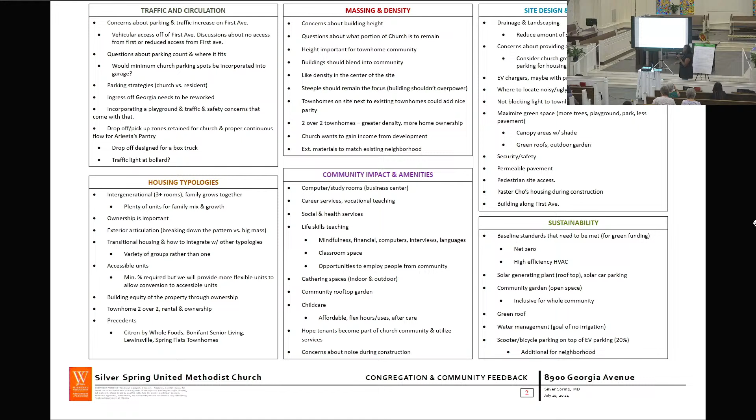Thank you, Allison. And I think on that note, we're not going to go through all of these topics because I don't want to keep you here forever, but you can refer to the presentation online if you want the details of everything. But we did have a visioning session with a lot of familiar faces that I see here participated in. Just by a show of hands, how many of you were a part of that session, that most recent one?

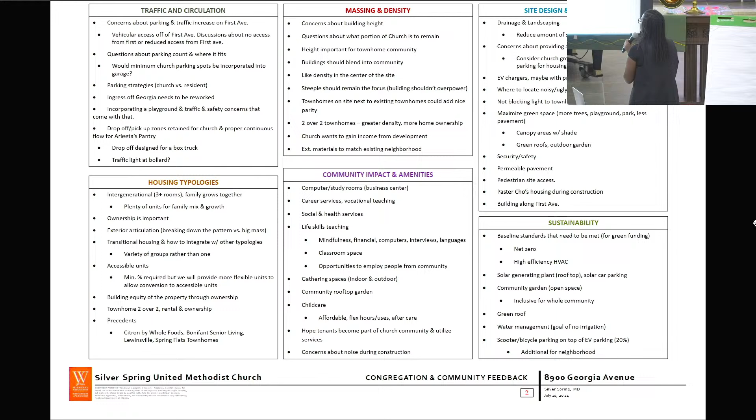We got so much more feedback than we were even expecting, and we really wanted to take all of this and do an exploration to see how we can begin to work this into a couple of different concepts. So before we get into a few of the first iterations of concepts that we did...

One thing that was talked about a lot during the massing discussion was the steeple. The steeple is such an iconic symbol of this site, of this church, and we wanted to make sure, and I think a lot of the community members we talked to wanted to make sure that the steeple wasn't going to be dwarfed by anything we put there. That absolutely will not happen, and we can show you a little bit about that as we go on. But maintaining the steeple as an important symbol was really important to everyone, so that's definitely an aspect we were looking into.

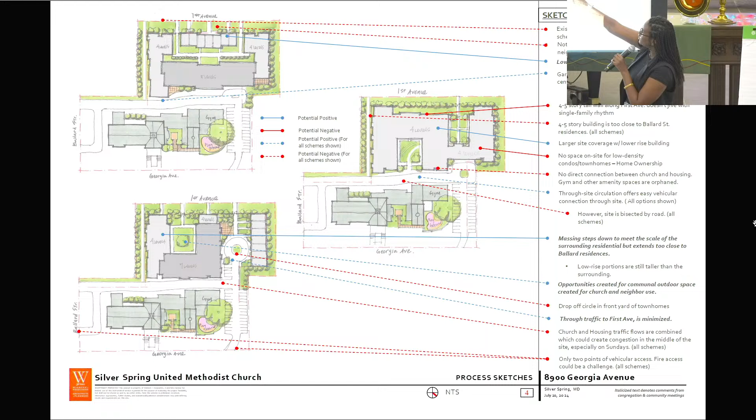We think the placement of the townhomes in both are actually a net positive. We like in the top scheme having the townhomes facing First Avenue. It brings down the scale of the massing to relate to the homes across the street a little better.

But placing the townhomes on the bottom scheme also helps relate to the townhomes that already exist here.

And that was actually a note taken from the last session, one of the suggestions that was given. So we looked at it and explored a couple of different locations, and we think we can see positives with both, as you'll see in the next concept.

Another big item with these schemes is the circulation. You can see they all have the same circulation pattern, with a connection from Ballard to Georgia.

There is no through connection and no vehicular connection to First Avenue, which can be a positive in some ways, reducing traffic to First Avenue, and I think that's the direction we were trying to go in initially.

But on the previous slide, we mentioned that the pantry service has a circulation that works very well, coming in from First Avenue and going through.

You can see that in any of these schemes, that would be pretty heavily disrupted, so you'd now be recirculating a lot of that traffic through the same central roadway.

Another aspect of the central roadway we thought we could do a little better on is that it bisects the site, with the housing at the top of the page and the church at the bottom of the page.

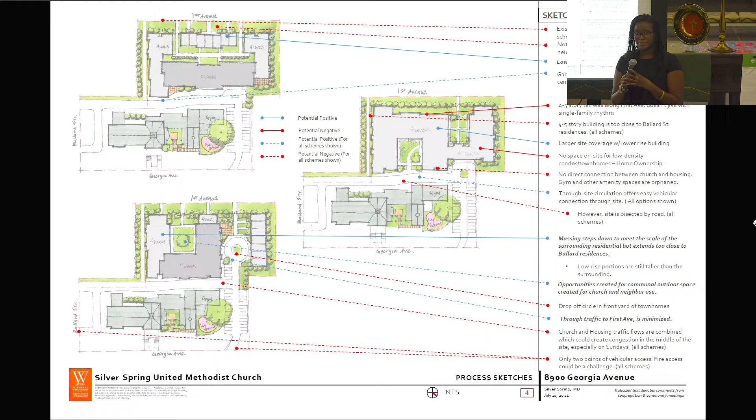So there's no opportunity for a direct connection between the future housing and the church building, which takes away some opportunities for community, for chance meetings, and for communication between the two.

So that was something we wanted to address in the next iteration of the scheme. And then the last thing I want to talk about with regards to these previous iterations is how far the building extends over to the Ballard Street side.

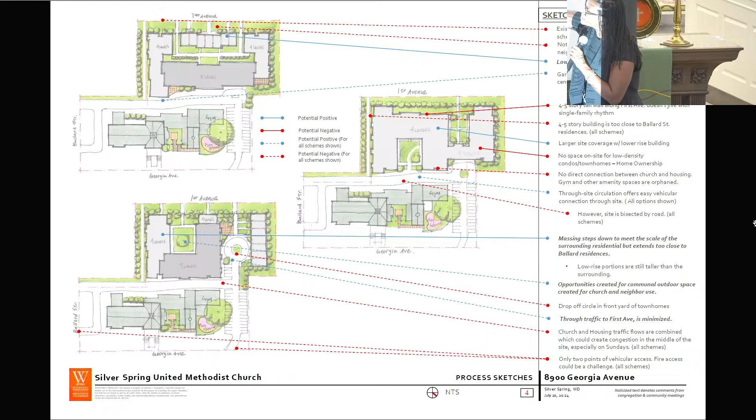So there's existing residences right here. You can see in all of these, we're pretty much adhering to the 25-foot setback limit from the property line, which puts our building massing stepping down to like a 4-level building, but even with that, you still get kind of a wall of building up against those properties, which may not be ideal. So in the future iteration we tried to address that and pull the building back a little so it doesn't feel so close to the neighbors.

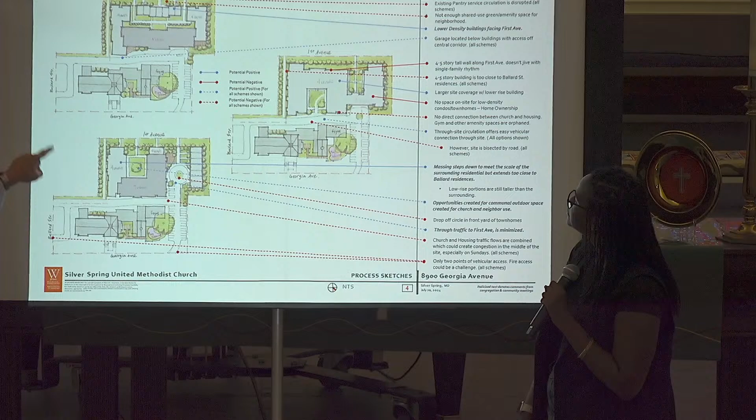So just a couple things we wanted to talk about. In all these schemes, we tucked the parking underneath, accessed off this connector road. But what that does is push what could be a 4-story building into a 5-story building along this connector road, with everything basically up another level. So again, we'd call it 4 stories, but in fact it would really be 5.

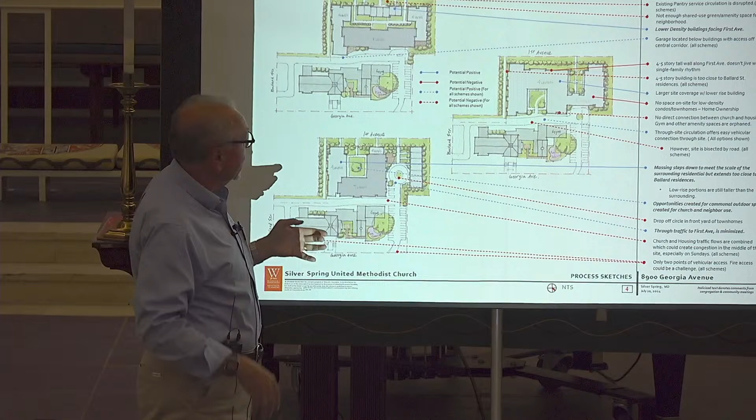We really like the idea of putting the townhomes across the street from single family. But to maximize home ownership opportunities, we have 2-over-2s, which are a 2-story townhouse with a 2-story townhouse on top. So that's in fact a 4-story building right there against the street, and we weren't able to pull that back in this scheme or any of these schemes.

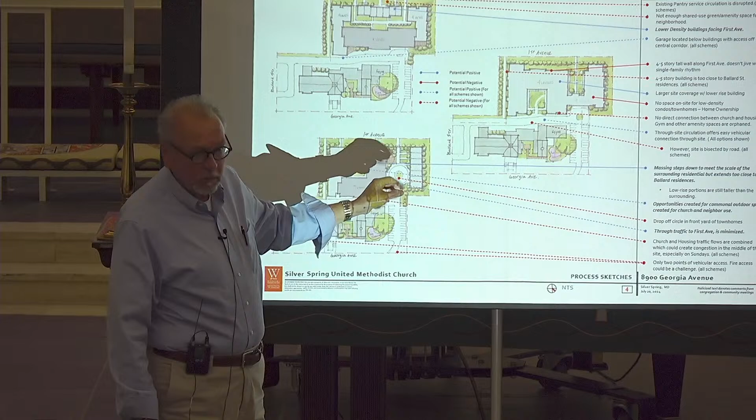In all of the schemes, we thought we had a good amount of green space, but we started to notice that all of them create a wall that prevents people from coming through the site. We really want to encourage the neighborhood to be able to use the site, and we want to build amenities on the site for the neighborhood.

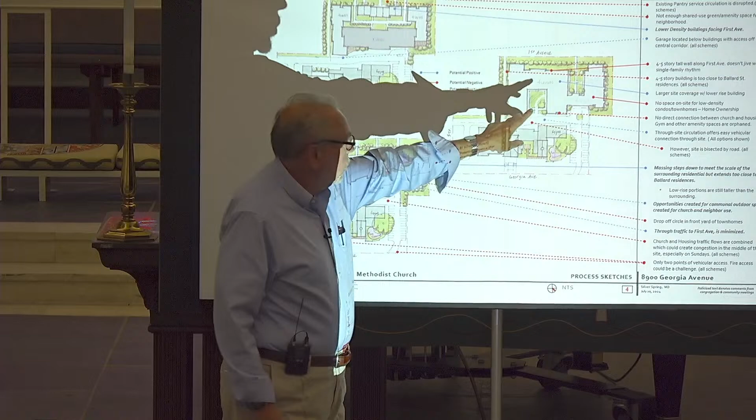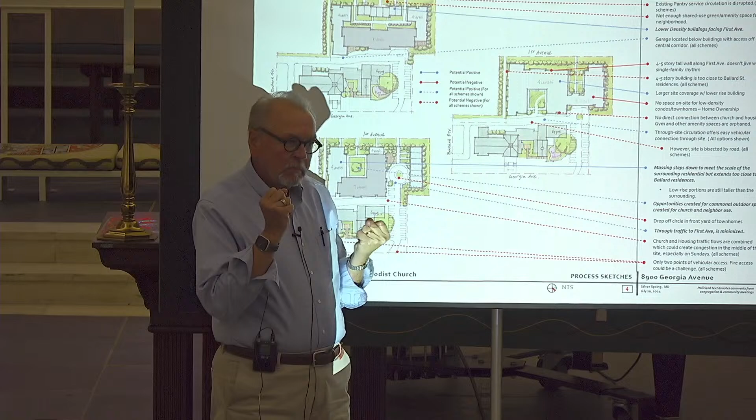So we looked at these, and this becomes a very private court, much smaller than you might imagine. This court - you can see this is a 60-foot existing parking lot, so this is only about a 45-foot wide green space over there. We started envisioning it, and while we could make it nice, we didn't think it met the needs of what the community talked to us about during those visioning sessions.

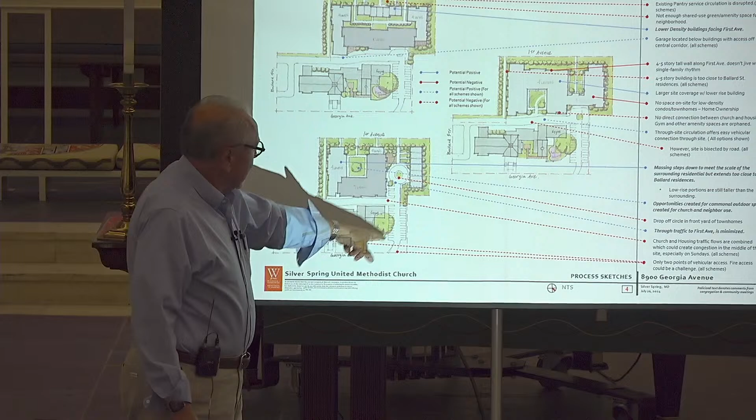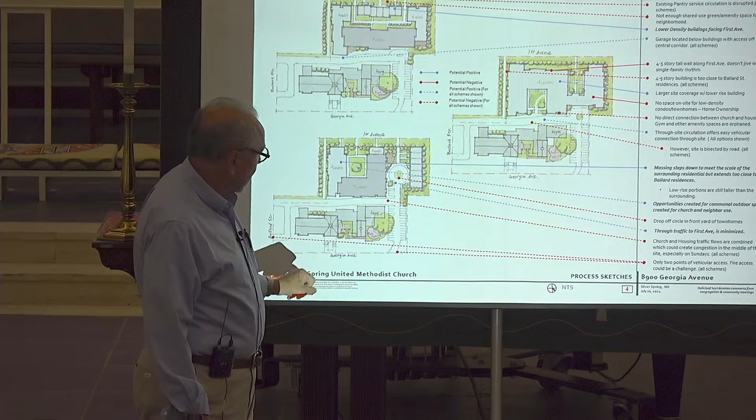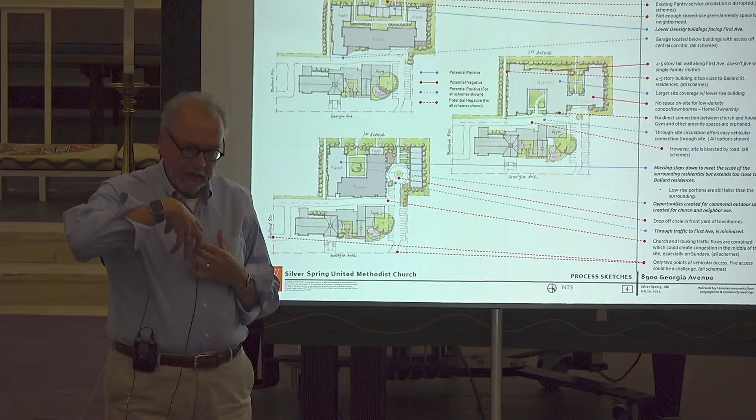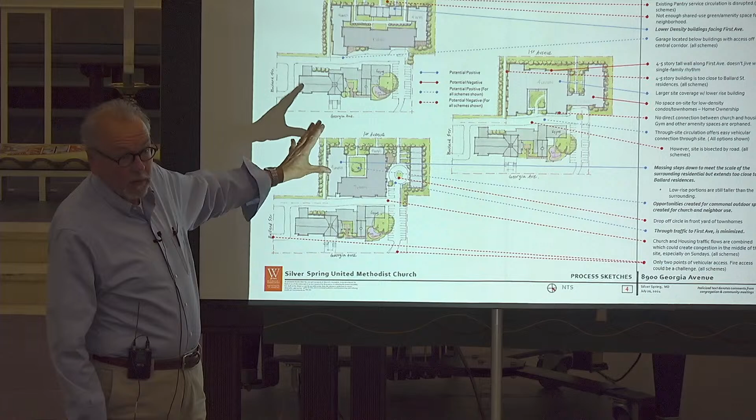And then finally, this scheme, we start to get a connection through, but we end up having to push the access to the building way up into the site to keep it out of setbacks and avoid other issues. That access has to be a certain diameter to allow for fire truck access and circulation, and as you see, that's right in the face of both the lobby and the townhomes in that scheme. So we really wanted to explore a lot of things, and we probably explored 20 other ideas. We just wanted to show you a smattering of what was considered.

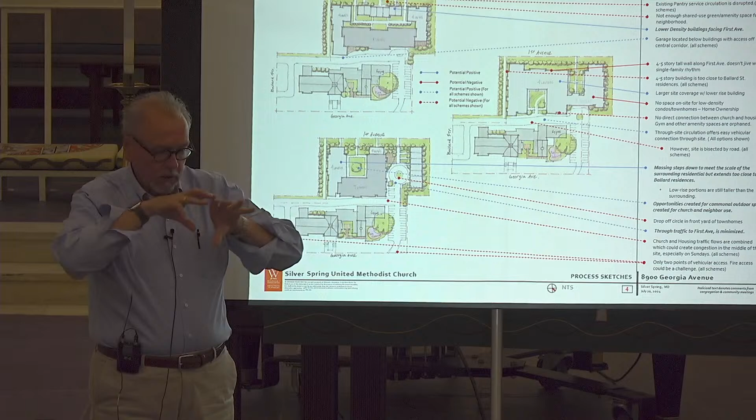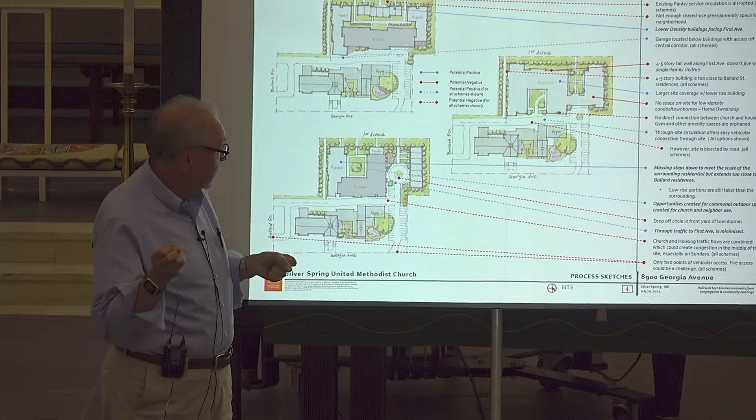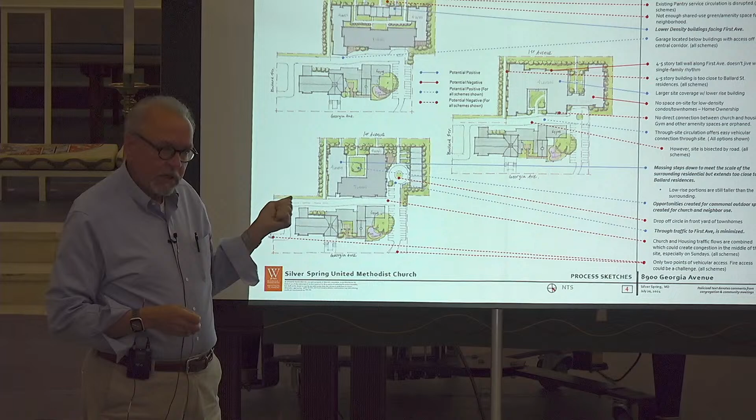And then as Temi mentioned, right now it's envisioned that the gym and some of the space above it - there's a double classroom that's now the teen lounge, I believe, and a couple other classrooms - are actually going to be part of the housing, so the housing can use that gym as an amenity space, but it'll still be open to and used by the community. But by having it disjointed, it really creates some ownership issues, site planning issues, and legal boundary issues. So you'll see in the next schemes how we try to deal with that.

So we're going to go through step by step how we started to look at things. One of the things we thought about was that a vast majority of the parking is going to have to be underground. A big reason is we have a lot of parking needs for this site, but also if we spread it out on grade, as you noticed on the second slide Temi showed - this existing site - you can see how much of that is paved. We don't want that; we want to create green space on the site. So we really need to tuck as much parking under the building as possible.

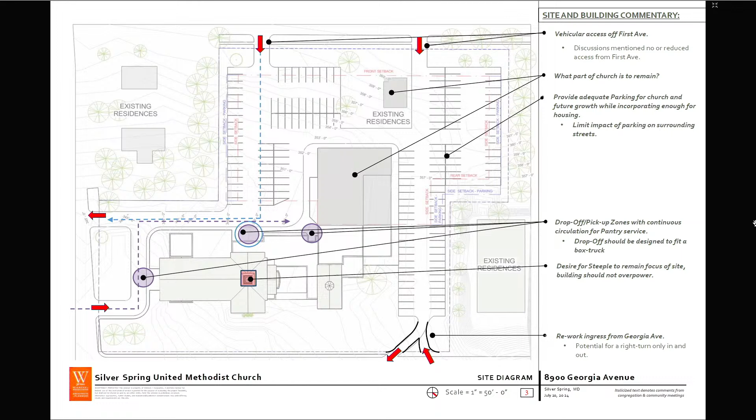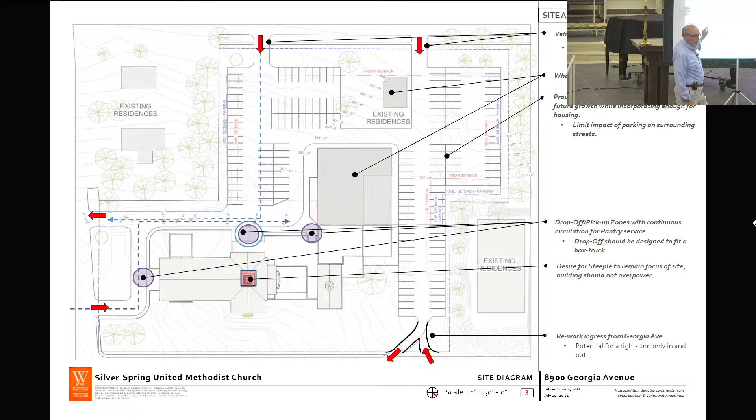In some of the earlier schemes you saw, unfortunately we had this driveway through, and we were able to retain this parking, but we had eliminated any surface parking directly adjacent to the entrances to the church. We really think that the ability to come in, circulate, park, and then go down into a garage means initial visitors and people with disabilities don't need to automatically be pushed into a garage as they're visiting the church.

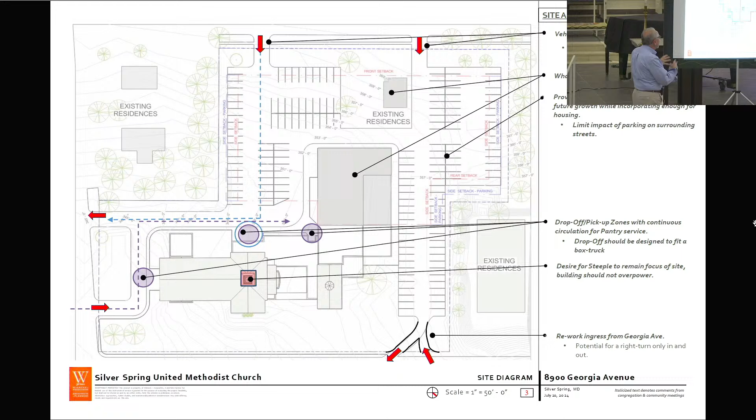So there we go, I was missing the colored lines. Within the parking lot, parking area, we're going to need to separate the uses so that residents don't overpark into the church's area and vice versa. That's easily done by having two entrances, an entrance for the housing and an entrance for the church, and we've shown in this configuration that this allows that to happen much easier. When they both come in one entrance, you have to have card gate systems inside the garage that make it complicated. We're trying to make it simple.

There was a note about bike parking as well. Bike parking is required per zoning, so we would definitely be working bike parking in, including long-term bike parking spaces, which would likely be located in the garage. We would also have some surface bike parking, not only for short-term spaces but also for community use, which was something we talked about during those discussions.

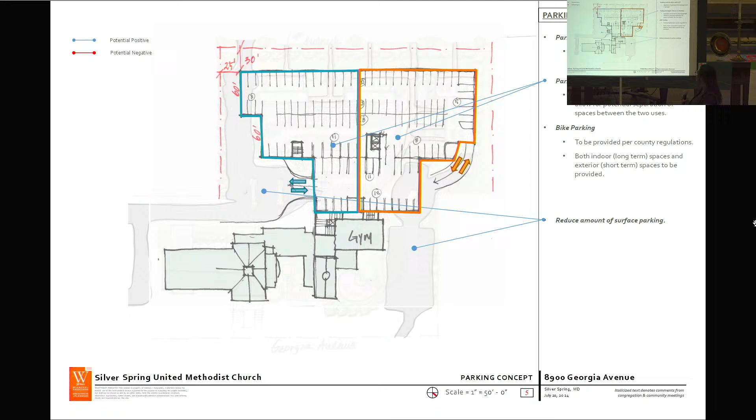This all interrelates, but we always heard that we wanted to make sure that the cut-through traffic that happens today from Georgia up to First Avenue is precluded. So we think that if we create a circulation and entry point for pedestrians and vehicles on one side of the site and then stop it with green spaces, that would be great, having the housing circulation there and church circulation over here. There's just this need to have some stacking space, and if we create that stacking space through here, it would end up falling back into this parking area and potentially prevent people from accessing the garage during a food drive or community event for the church.

So we did think that leaving an entrance and circulation path with some parking off of First Avenue is a good idea. What that also does is let us retain and enhance the green buffer here and put a green buffer on the other side as well. Essentially that pushes the building another 40 feet away from the setback line, so we're about 65 feet away from the property lines of the two homes off of Ballard.

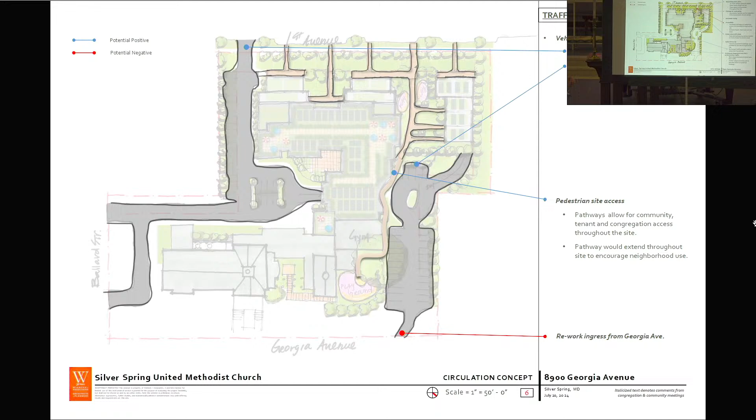Getting a little deeper, one of the things we said we'd want to do is depress that parking so it doesn't end up being exposed in the parking lot areas. What that actually does is allow us to push the whole building slightly down into the ground. When you extrapolate the first floor out to what might become townhomes—say we develop these as 3-story elements—they're actually going to be only 2.5 stories relative to the grade at First Avenue.

They're actually only 2 stories relative to the grade at the 3 houses that face us across First Avenue. So by depressing that and creating sunken gardens—with a retaining wall and some stairs, maybe a pergola or some soft element, and something similar here—you can come in and circulate down through the site. These become more intimate, contemplative spaces that, even though First Avenue doesn't have a lot of traffic, it's nice to have that grade separation so they become spaces you can feel within nature.

One thing I want to point out is that this main thoroughfare that meanders through the site is for everyone's use, and the idea is that this is an accessible pathway. It's shown in red because in this sketch we're showing steps; in future iterations we would work in ramps to make sure these pathways are accessible to all.

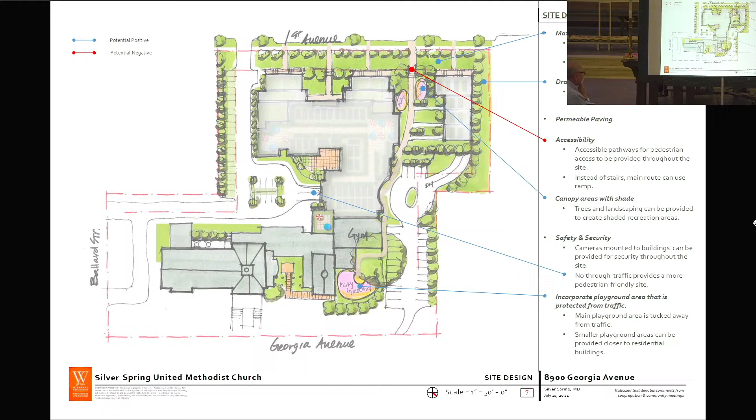So massing-wise, as I mentioned, we started to wedding-cake this away from the site, from First Avenue in particular. In earlier concepts we were thinking of 2/2s happening, but we decided to make these into essentially duplexes, 3-story towns depressed into the grade so they're only 2.5 stories from the sidewalk. This keeps them much lower in scale, more in keeping with the houses across the street, and by making them double modules, 2, 2, 2, we replicate the rhythm and width of the houses across First Avenue.

We're trying to make that feel more like a residential street and not just a string of townhomes that closes that space off. Then stepping back some, we would come to a 4-story element.

And we would then put our 2/2s behind the 2.5 stories in front of it. What that does for us is when you start from the curb, before we get to a 4-story element, we would be 78 feet from the curb to the face of the 4-story element.

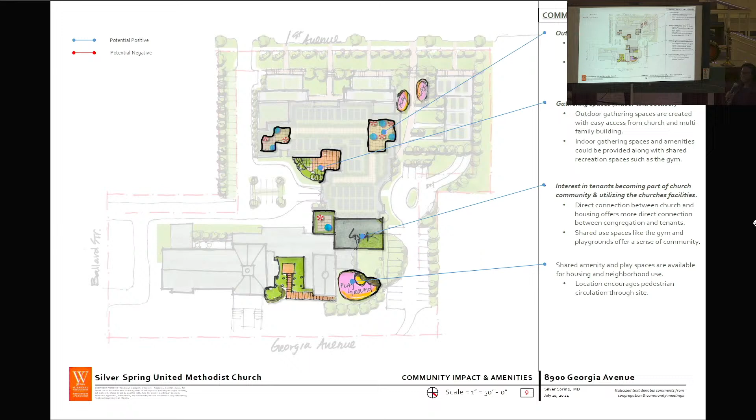And then sustainability, the church and Enterprise, I failed to recognize Ned, the church's partner, Enterprise Community Builders. We were required to be very sustainable because of the funding that's potentially going to be used, but the church and Enterprise are very committed to making this a hugely sustainable building.

We'll probably have to have green roofs regardless, because we need quality control of the stormwater, and the green roofs really help on that. But it becomes a great amenity space too. When you're walking up there, it feels really nice, and we can actually put planters up on top, so it's not just this low-scale planting.

But then we also, on all of our buildings, put photovoltaic to try to reduce the energy needs of the building. Typically, there's not enough photovoltaic on the building to do much more than provide maybe the corridor lighting, but it's a step. And there's a lot of different steps we have to take in a building like this to meet the sustainability goals and needs.

The program is that we want to make this a net zero building, so that we aren't impacting the environment so much. And as I said, we have this opportunity. One of the things that would really help soften these buildings, we've got a building in Washington, the So Others Might Eat headquarters, where we have cascading planting.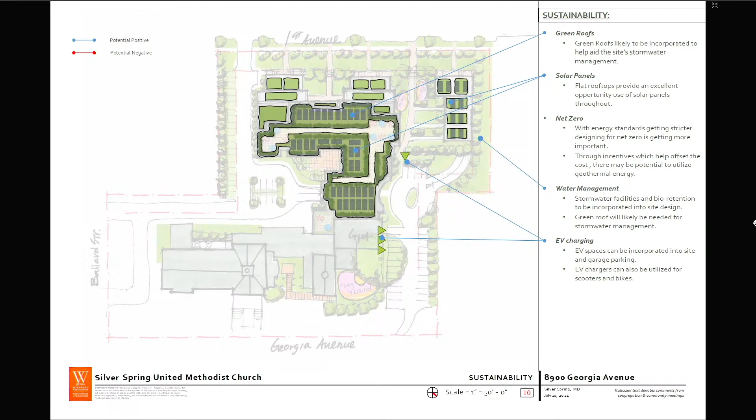Loading and trash. We have ideas - loading can tuck in through here pretty easily. Trash would be collected within the building and pushed out when there was a trash pickup. There's not going to be a big dumpster sitting outside of the building. And what we do in a lot of these projects where we have an existing building and the housing, we try to figure out a way to allow some connection of those services so that we don't have to have a dumpster sitting outside of the church either.

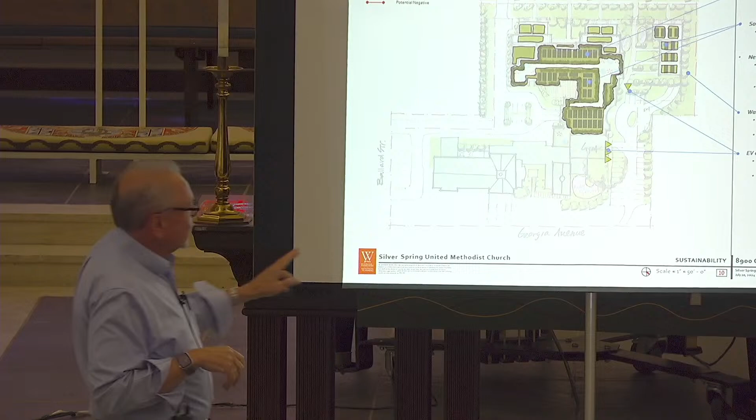At this level, we haven't really gotten down to it. We know that we have the space for it, but whether it's going to be over here or over here, tucked under the building or tucked in this side, we haven't gotten to that level yet.

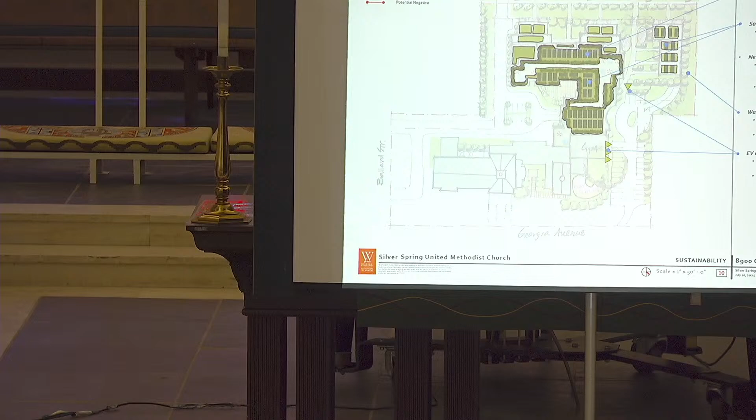I apologize, it's a little late, you already talked about this. I was curious about the traffic flow. Traffic flow from First Avenue, is there just one access point, and is that a public road or a driveway? What is the main entrance, and is that the curb cut as it is now?

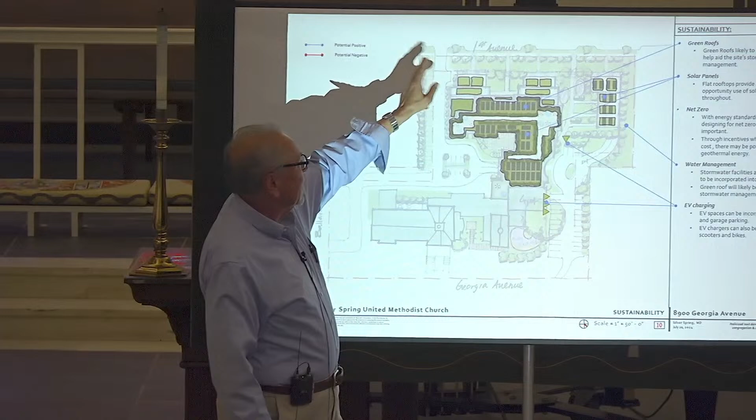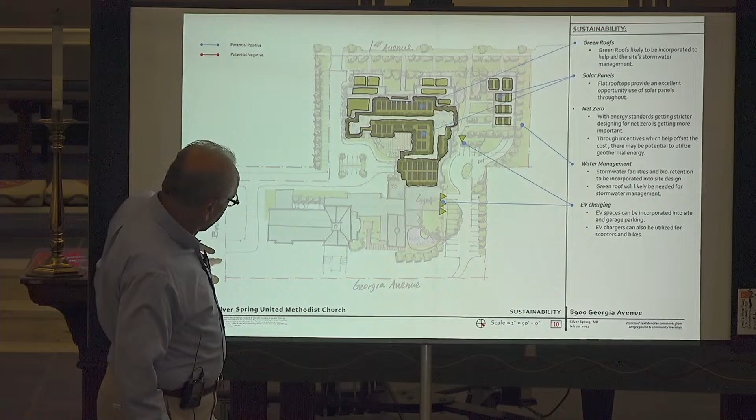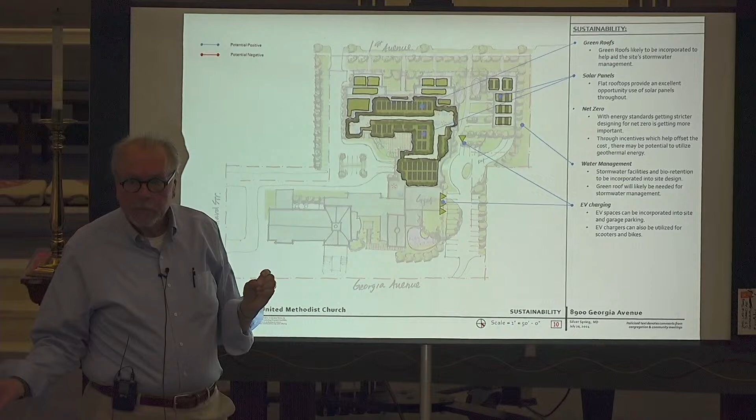It's close to where the curb cut is now. We've talked about whether that could be one-way or needs to be two-way. The main entrance for the church would be here, off of Ballard, coming in this way. But as I said, during queuing events, which happen monthly when there's the food pantry pickup, that's actually working really well for the church, so we wanted to maintain that. But we've absolutely gotten rid of the second access point.

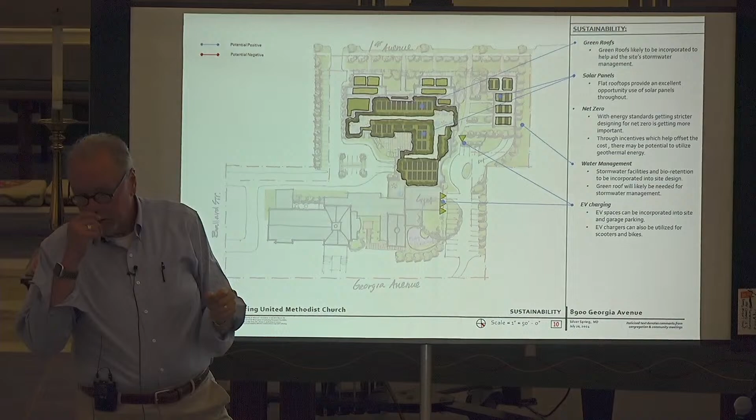Right now there's a driveway on the other side. You can come in on Georgia and drive straight through and come out onto First. That's gone in this kind of a design. Okay, thank you.

Thank you, I've got a couple questions. I'll start with one, which is parking related. First of all, on Georgia Avenue, the angle of the access is egress, not ingress. Is that going to be both?

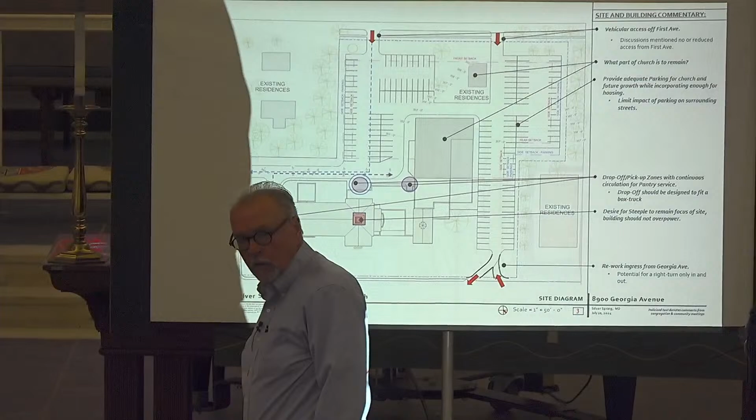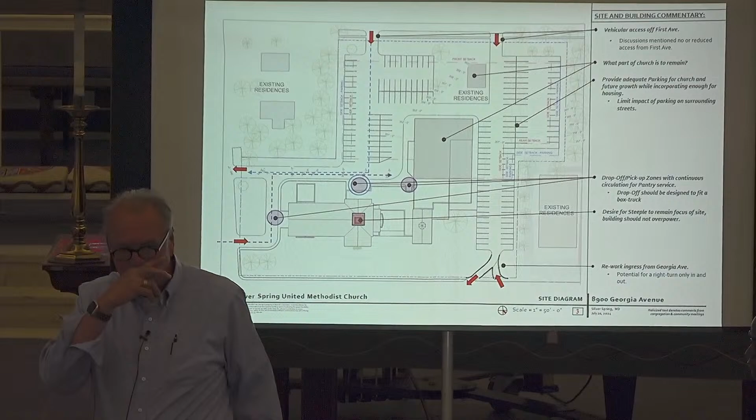Not even that, but coming straight down, if you're leaving you can only go out right, and if you're coming along Georgia you can only go in. It's an easy turn. What DOT typically requires is a median that separates that so we don't have people trying to make awkward movements there. So there will be ingress as well.

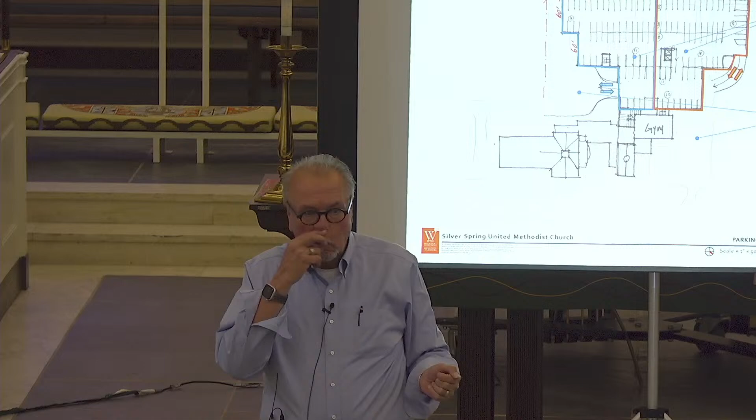Georgia. Okay, so parking - I have a former colleague, and I'm dating myself, but he said that parking is the Rodney Dangerfield of development. The parking access in the garage down below is for the residents, and then the parking on that side is for the church and other activity - the visitors to the residents, where are they going to park? So it'd be envisioned that they would park here, but in a lot of buildings with 170 residents, I have no idea, and other people will have knowledge of what sort of volume you can anticipate.

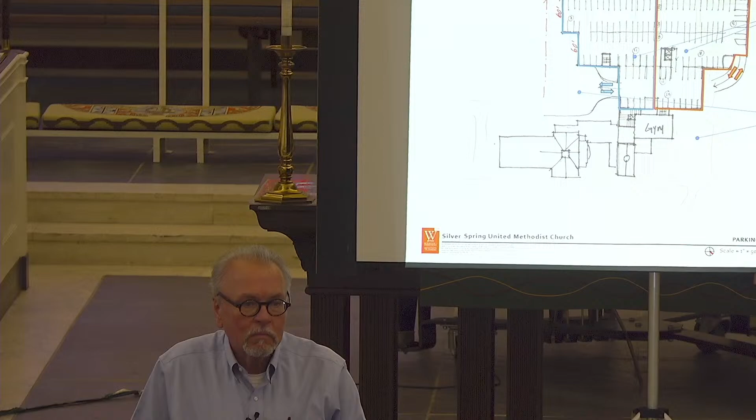But how many spaces would you have in that front open area? Right now there's about 28 spaces there, which is plenty. And does that relate to the number of visitors you might expect? No, it's way more than we might expect for visitors. Downtown, we do buildings that are complete sites, and we'll have 7 to 10 spaces in a 180 to 200 unit building, and that's typically sufficient.

Just to respond to the parking question, because as the pastor of this congregation I know there is significant anxiety about parking on our end too. We were reminded in a conversation with our development team this week that parking is going to continue to be one of the most significant and complex questions we answer. We're not going to have answers for another 4 to 6 months.

The first thing we have to really answer is the massing question. What you've seen here are two different models: a 4-story massing and a 7-story massing max, which themselves come with different complexities. The 4-story massing is much cheaper to build because it doesn't trigger something called Davis-Bacon, which is a federal law that requires a certain wage scale for employees working in a building over 4 stories.

So if we go up to 7 stories - keep in mind the steeple's 12, you'll see that shortly - that increases the cost of the project overall by about 20%. So if you're looking at a $30 million building at 4 stories, add 20% on top of that for a 7-story. We're trying to answer that question in the massing plan right now. Parking is going to be harder for us to figure out. For church folks, remember, we now rent the lot at the DHHS facility for overflow, just knowing that we already fill up our lot on Sunday mornings.

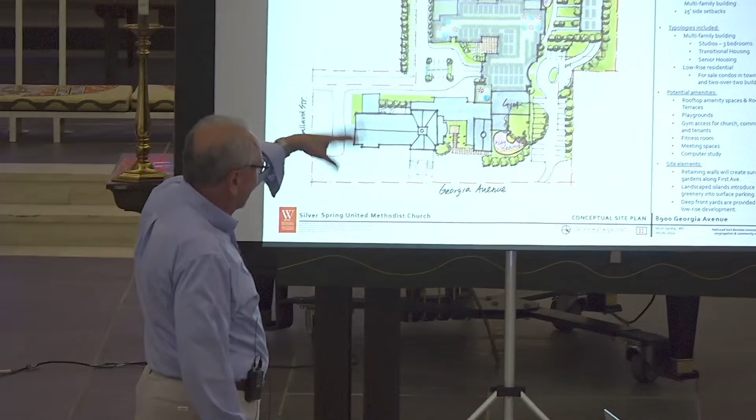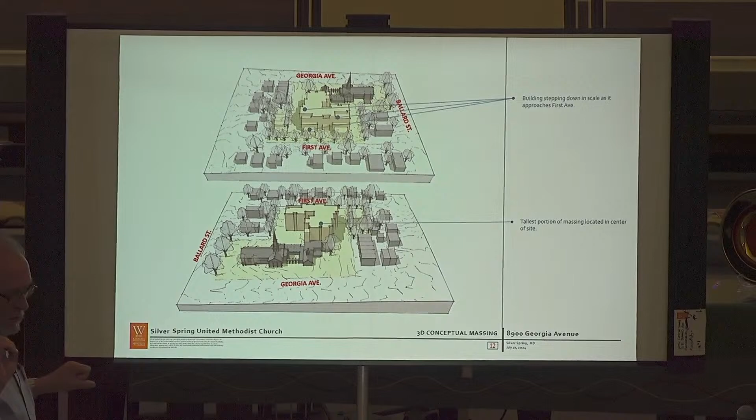So I think it'd be good to just start looking at these other elements. Keep in mind these are very conceptual, and these buildings will evolve 30 times between now and even the end of the year.

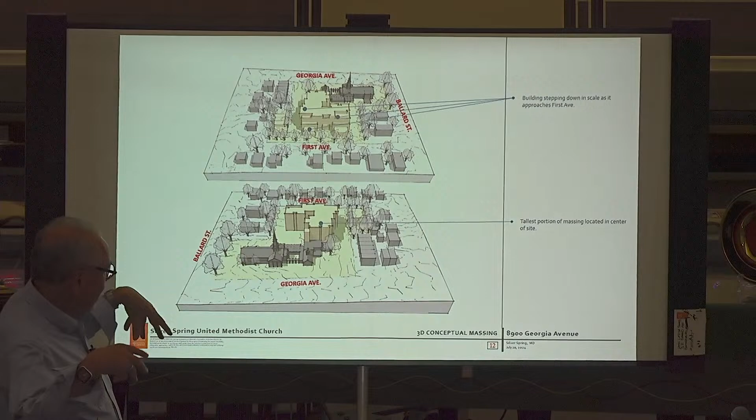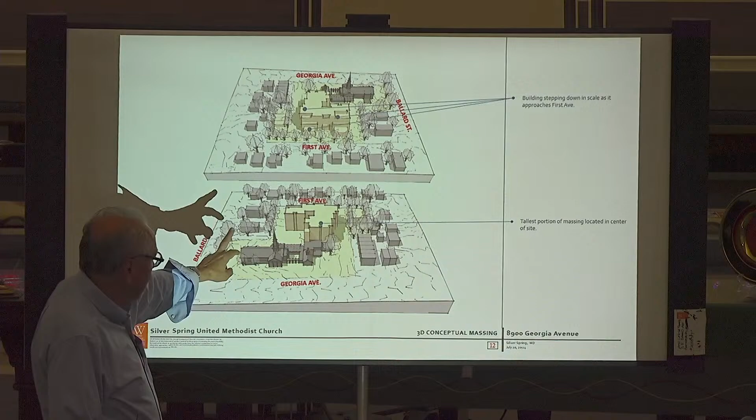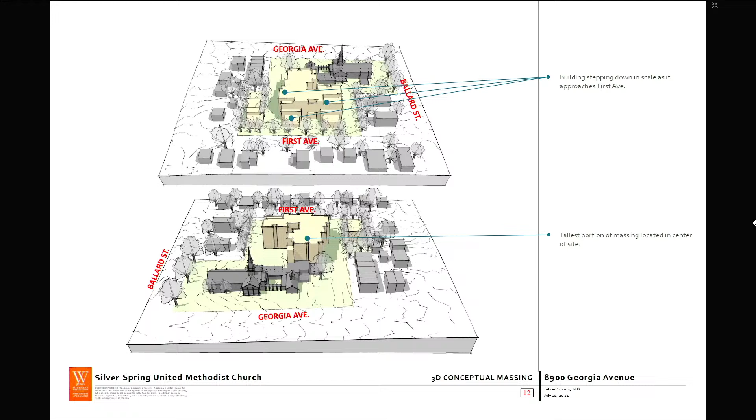This is an aerial view, so everything looks bigger because it's trying to show the overall concept. From Georgia Avenue, the church spire, as the pastor said, is 5 to 7 stories taller than the tallest portion of the building. We're looking at having the center part be the tallest, and then figuring out how to modulate it down to relate to the surroundings—we don't have all of this figured out yet.

We're trying to keep away from that. You can see how we've stepped the building so it creates a kind of forced perspective site-wise.

Looking at it from First Avenue, you can see the 3-story townhomes. On one of them, it's hard to see here, but we implied the top level could even be a mansard type roof to help break it down. We'll show some precedent images in a bit that we'd want to really talk with the community about. We talked in the charrette about using similar materials and window patterns, trying to make the scale and texture feel the same, and then you see how it steps up.

This shows it as if it steps completely up to 7 stories, and this is actually drawn a little incorrectly—the 7th story doesn't occur all the way in the front.

So let's go to the next one. Real quick, one other thing you can see from this is how far away the building is from those neighboring houses, and how much more space that gives them.

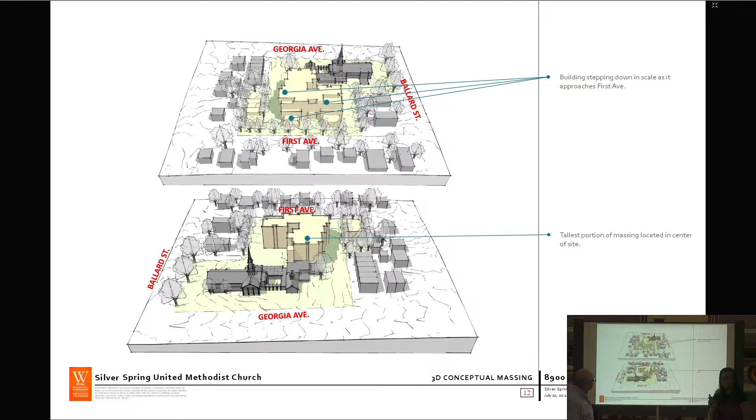Unfortunately we've got to figure out a way to make this program, SketchUp, not go to such a super wide angle—it causes everything to be foreshortened, so it seems like the building is piled up tightly. But this is about the height of where the roof line breaks on the houses on First. The gray one would be an existing house, and you can see the height of the 2.5-story and then the 4-story portions as we step up.

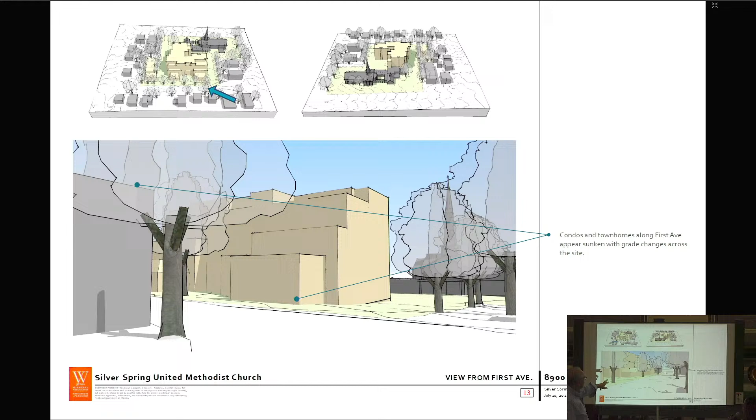Of course, we'd have a great landscaping package as part of all of this. And this is looking from the other side, just to give you a sense—you can start to see this mansard idea right there, and how low in scale it is.

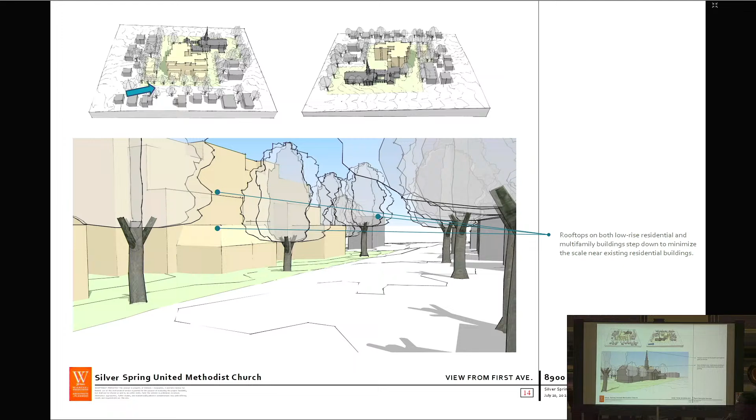Again, this is a house mass over on the other side of First, and you can see how narrow the street looks because of the wide angle. You can see the height comparison when you get up to the 3-4 story portions, and how that compares to the houses across the street. For neighbors who know, that's Chris Parkin's house.

For neighbors who know, that's Chris. Oh, hello. I do that most Sunday mornings just to make sure people are awake. For people who know, that's Chris Parkin's house.

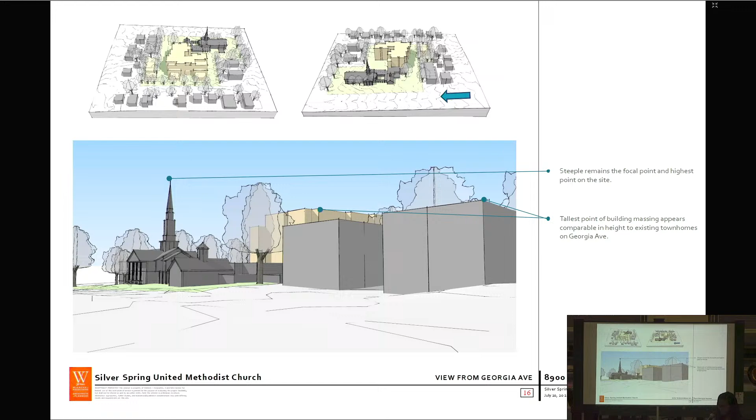This is coming the other way down Georgia, and the existing townhome community is shown in gray here. Again, you can see how the building, as it's currently massed, would look.

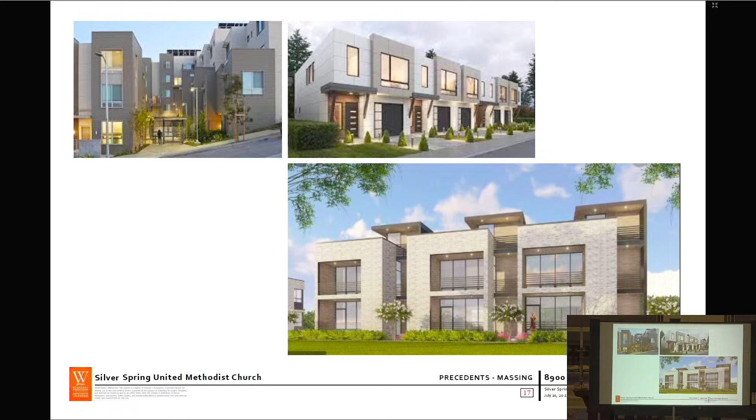This gives you an idea of how the units can be set so that they break down in mass and in scale. I like this one because it starts to relate to an interior space, like the courtyard or the walkway that we have coming between the 2/2s in the main building. Go to the next one.

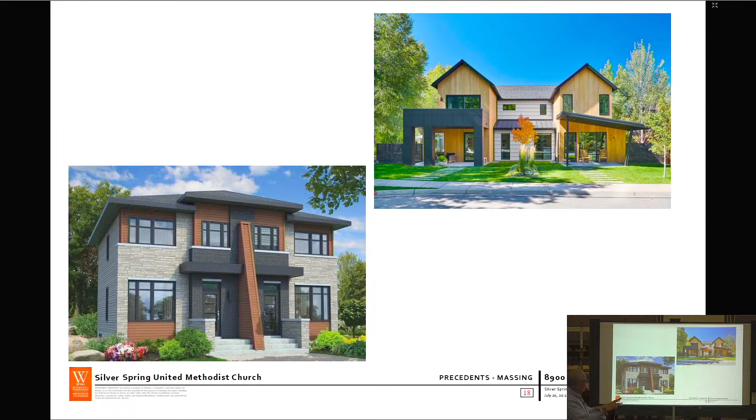I really didn't particularly like this thing, but otherwise the traditional styling of it may be something that could be appropriate.

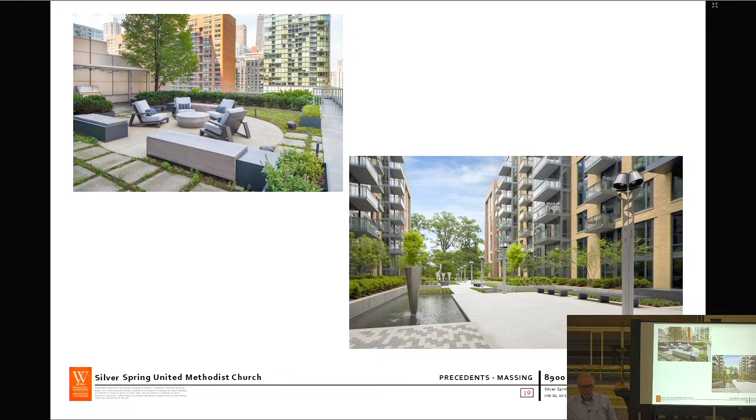Up on the roofs, we can create these wonderful spaces, though probably not a tree that big in this building since we're going to build it out of wood. In some cases, owners allow community access for very specific purposes, but we'll leave that be.

Some other plaza spaces, utilizing lighting that sort of invigorates the space. I could see that happening over the playground that we have starting to be developed up in the front corner, so that at night it would have a special lighting to define it.

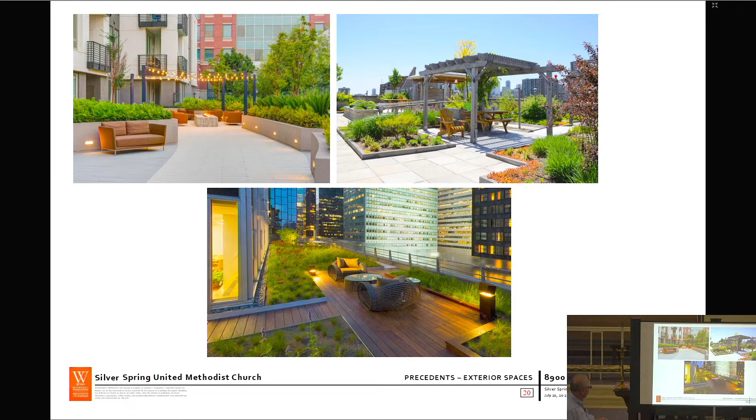Again, just a lot of different ways we can create the look of this. This could be like the terrace down into the space beside the church right in here. These retaining walls and stairs are similar to what would be coming in off of First Street and coming down into the gardens.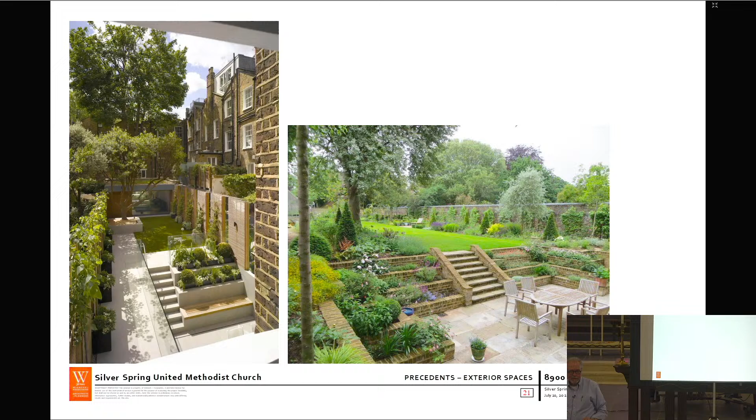And with that, that is all we have for you. Do we have any questions? I'm sure we do.

That was great, I thought it looked fabulous. I missed the past couple meetings and it's really beautiful. My question, I'm confused about parking because you said it was going to be - is it underground or is it just pretend underground? Because you said it was going to push up the building to 5 stories, but if it's underground, why would it push it up? I was just confused.

In the first several schemes we looked at, we allowed it to be above ground at the grade here at the church, but it would be tucked into the ground up at first. In this scheme, what we did is, even here, we've dropped it down so that it's only protruding maybe two and a half feet. So it's like half underground, half not.

Because I know it gets very expensive when you go underground, I was like, that's a big money thing. And my other money question is, those pictures are great and I'm so easy to persuade with marketing, but when you talk about those images, they tend to be $4,000 apartments in Navy Yard. They don't always make it when you spit out affordable housing. So it's like, you can have quartz, no, you're really only gonna get Formica, that kind of situation. Is there anything built in to actually make those realistic? Because I feel like we're marketing something that price-wise may not play out. So I'm just noting the discrepancy there.

Ned, you can comment on what I say, but we do a lot of affordable, and you cannot distinguish it from market rate. Actually, most of our projects do have quartz in them these days. The PLAM may be $200 less per unit, but you're going to replace that. So what you end up seeing in affordable housing is we use a higher standard of cabinet than we do in a market rate product. Because in a market rate product, somebody moves out, they trash the cabinets, they toss them, and they put in new cabinets. In an affordable product, they've got one bite at the apple. And the same thing with landscaping. Ned's a civil engineer, he's going to really make sure we get fabulous landscaping and site design.

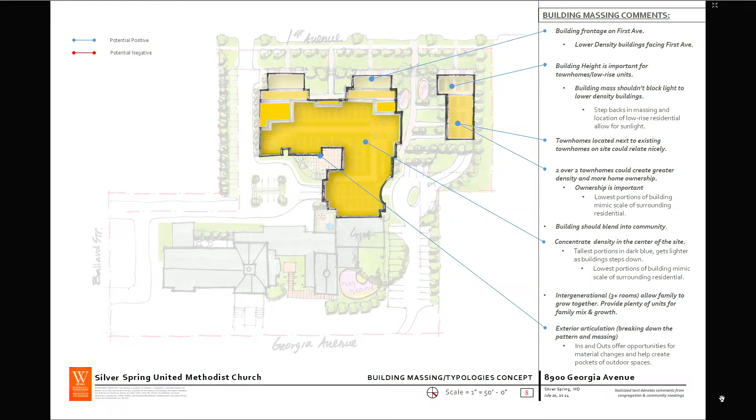Just need to—okay, so see the setback line right here? The house is actually sitting, according to this, about a foot off there. And those townhouse modules we're showing along there are actually 6 feet back from that property line, so they're actually 6 feet further back from the street than the current house is.

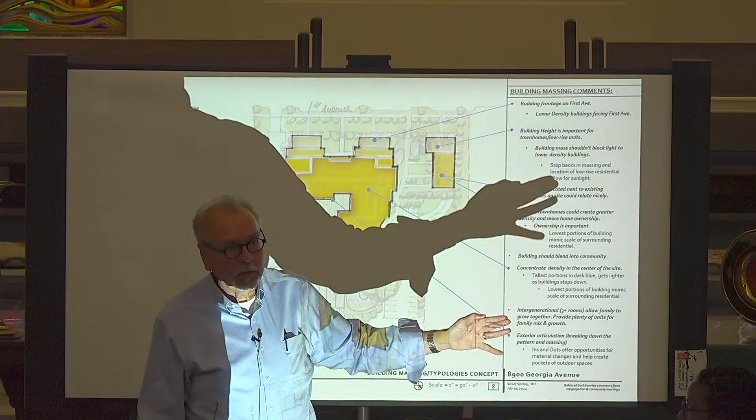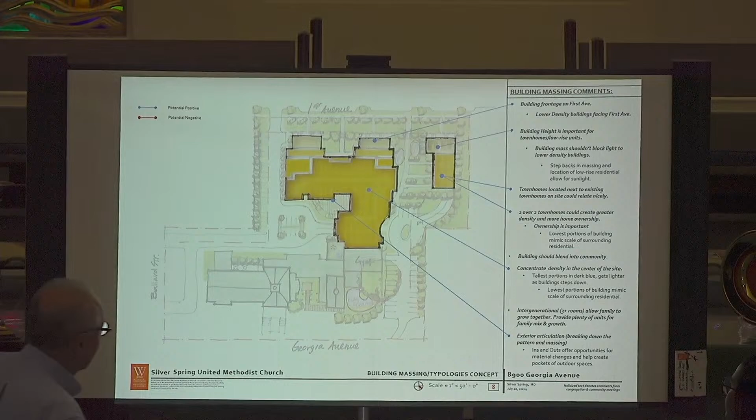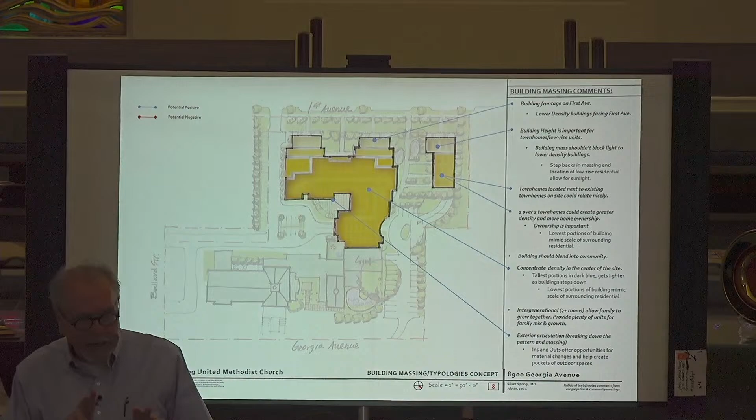Space created along First Avenue from what's currently there, including eating up that parking lot paved space. You can see it's hard to see here, but that's that same line, and we've held it back here. What we're thinking is we'd enter actually up that half level up, so we'd have nice little stair stoops that go up and porches possibly, to create texture, but that also was done to pull the buildings further back.

Might be jumping the gun, but can you give us a big picture timeline? Like how many years till breaking ground, what construction would be? If they got into a tax credit round, that maybe is going to happen in the beginning of 25, and then it gets awarded middle to third quarter of 25.

What's in 25? The funding round for the low-income housing tax credit funding. So then it depends on whether they feel comfortable letting us start documents early or not. If we waited for that all to happen, it takes a year to do documents for something like this, and then another 6 months for permitting and getting the bids. So we're talking about mid-27, early-28 to see construction start. And this, at this scale, is probably a 26-month project, something like that.

That answers my question. How long, since I live across the street, will construction take? Because this is heavy construction, it's going to impact us. I'm old now, I'm 75, so we're talking about the last part of my life, I'm going to be living across the street from a whole noisy thing. So you're saying it's probably going to take, would you say 2 years, 2.5 years?

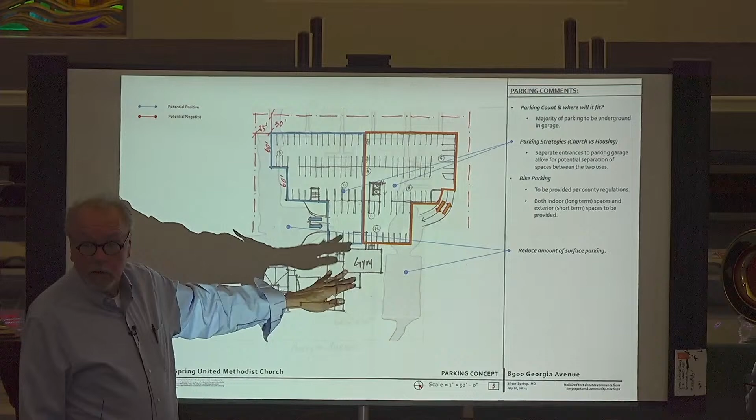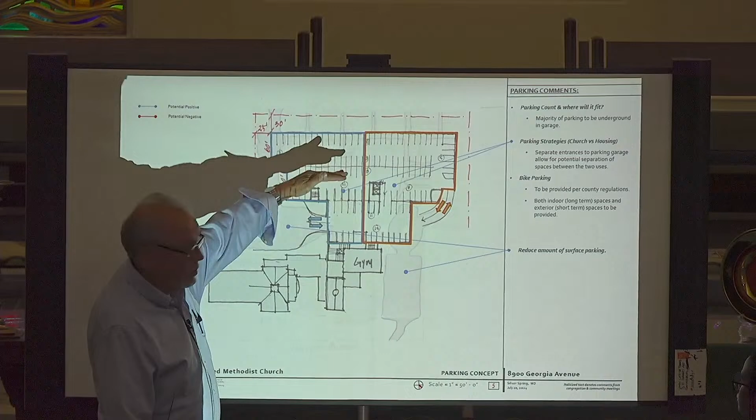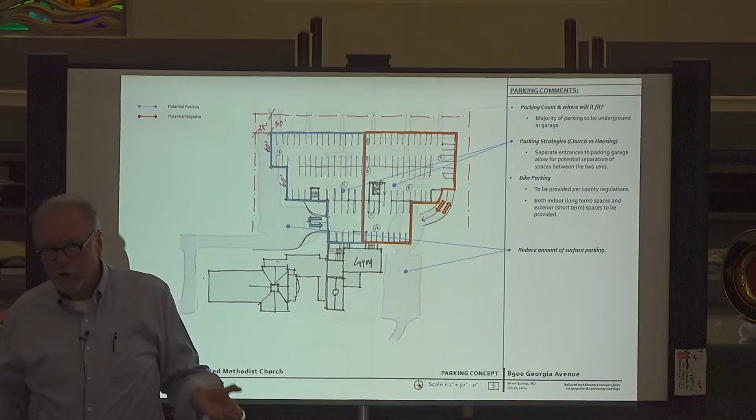Yeah, here. So while this is the garage, the gym actually sits a floor below, as you know, underground. So we're envisioning that from the lobby of the building, which would be up here on top, you can either come down a great stair, and there's a corridor here to a classroom space that may be programmed into storage for the gym, and then there would be an elevator also coming to that. And then there's some restrooms here that would be reprogrammed—they don't meet accessibility standards, and with a gym use, you need accessible bathrooms and more bathrooms. So there's a linkage to the upper level, and the way it's currently envisioned, the lobby would happen on the floor above and could be looking down into the gym, and we were trying to make it feel very connected. And then there's an opportunity here, because the building could have a jog here, that we could actually create an after-hours entrance, assuming that housing could make that work security-wise and felt comfortable with it, so that neighborhood users could access it, or they could always access it through the lobby and down.

Is there much money planned to redo that space? It's pretty ancient, the gym itself. There's money planned for a lot of things, including that—the planning of the money is still in progress. I mean, you call that an amenity, but it's a pretty sad gym. The funding sources would not allow it to stay the way it is. It's got a lot of humidity problems, a lot of HVAC problems, roof problems—it'll be essentially new inside. Right, it's a mixed bag.

I know it well, I've known it for 40 years. But anyway, I just wonder what the value of it is, whether it could be used in another way. I know what you're doing with it, I know its value, but there's just a lot that needs to be sunk into it, and I question if that's the best use.

I laughed, Fran, and I'm sorry, because when Dylan, my partner, and I first toured the space, he insisted that's where COVID started.

The gym is a special place in the life of this congregation. It was where, for the first year and a half of their occupancy of the site, they worshiped. And so we have members whose children got married there, and members whose parents' funerals were there. We're walking that line between honoring that history and connection, and the great need for spaces like it in the county. So one of the emerging conversations right now in this area of Down County, both as we work with partners like Interfaith Works—and Reverend Rosalind Roberts from Interfaith Works is here with us today, in Shepherd's Table—is the fact that the county does not have many facilities available for their clients to use, like the gym, as well as the fact that there are incentives on the tax credit side of things that might allow us to do some of that renovation.

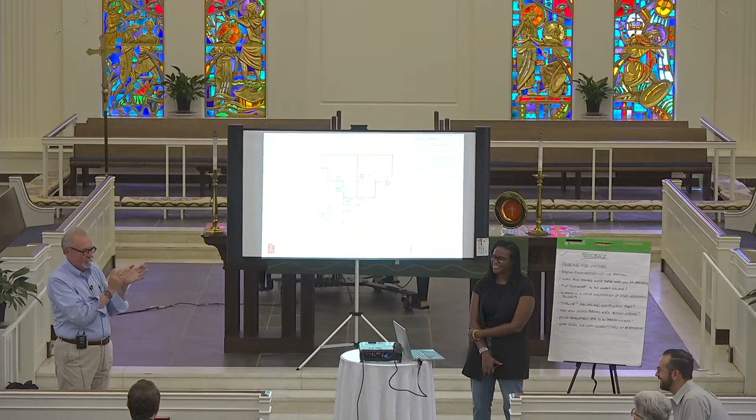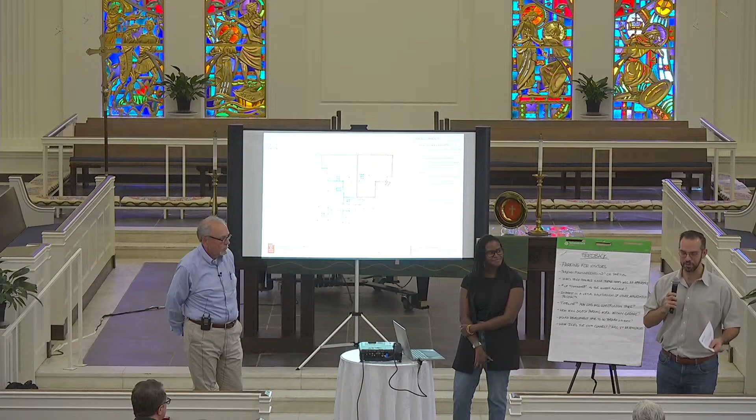We're so glad to have with us today Reverend Lucinda Kent, who is our Baltimore-Washington Annual Conference Property with Purpose Coordinator. Among the many hats she wears, she's also the pastor of one of our partner congregations, Van Buren United Methodist Church. Pastor Cindy, we're glad you're with us today.

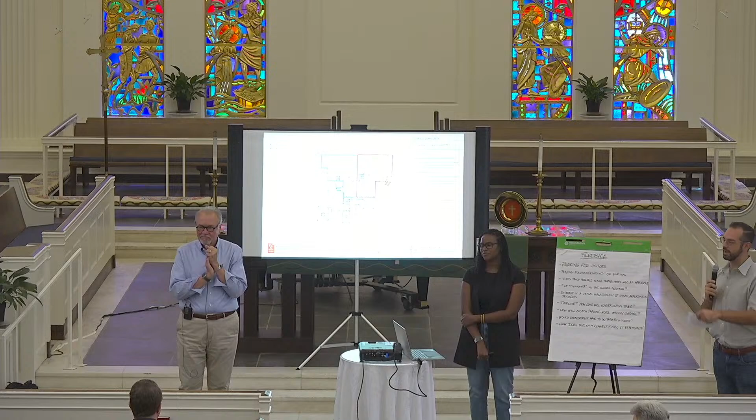You've already heard that Ned Howe is with us today. Ned represents Enterprise Community Development and is one of the critical partners in this work. So Ned, we're glad you're with us today. And Reverend Rosalind Roberts, who represents Interfaith Works, is with us today as well. Roz has been a partner in good trouble in the county, and I look forward to more of it.